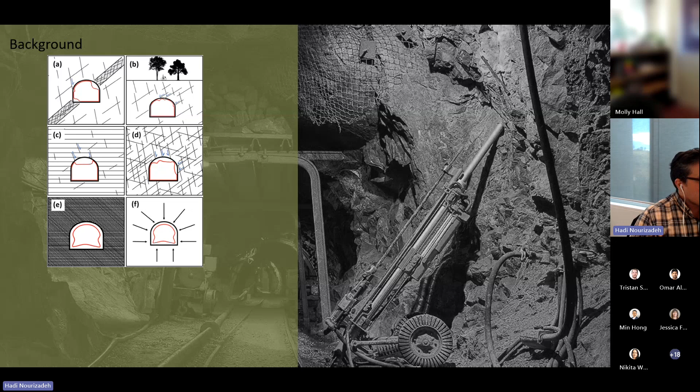So we need to improve the stability of these openings. We have different approaches by which we can improve this stability. Mainly we use ground support systems or reinforcing systems. In this session, I'm going to talk about the reinforcing approaches. So what is the reinforcing system? Reinforcing systems consist of many different elements, but mainly we call them rock bolts, cable bolts, or ground support systems.

So what is a rock bolt? A rock bolt is simply a deformed bar that we put inside a hole in the ground. Then we encapsulate these elements and fill up the gap between the rock mass and the reinforcing elements. We can use different encapsulation agents, such as cementitious grouts, which are very common in civil applications, and resin, which is very common in mining applications.

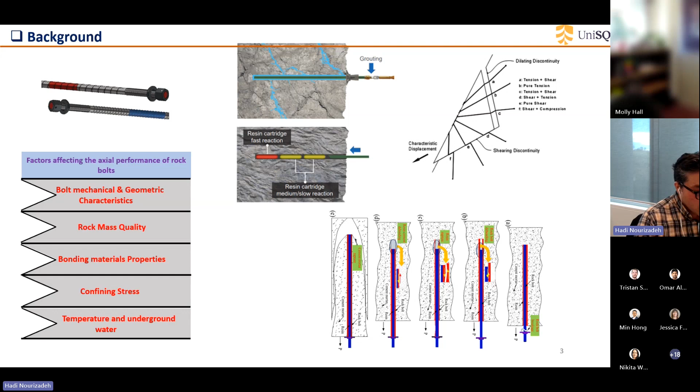When these elements are installed, different types of loads and deformation can apply on them. We can have axial, depending on the movement of the unstable rocks. So we can have tensile load, torsion, or shear, or something more complex, which is a combination of all these loads. In this session, I'm going to focus only on the axial behavior of these elements.

When we apply axial load on these elements, failure can occur in different areas. This can be on the reinforcing element itself due to rupture of the bolt, on the bolt-grout interface, or on the rock mass as well. By the way, these elements can be made of different materials such as steel, fiberglass, or carbon fiber. I don't want to talk about these materials; I'm just talking in general.

Different factors can affect the behavior of these reinforcing elements. These can be the mechanical and geometric characteristics of the elements themselves, rock mass quality, bonding material properties, confining stress, temperature, and underground water as well.

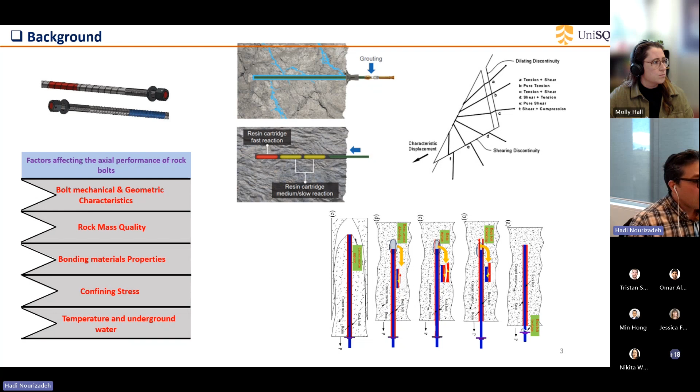If we review the literature, we can see that since 1980 the effect of confining stress has been acknowledged by many researchers, but basically they have assumed that the stress is in a hydrostatic condition. But when we install the reinforcing element in an underground application like an urban tunnel or mining, we have stresses around these elements with different magnitudes and different angles. In rock mechanics engineering, we consider three principal stresses around a reinforcing element, called sigma 1, sigma 2, and sigma 3.

This effect has not been considered in previous studies, but in this specific study, we put a step forward to see what the real effect of these stresses is if the magnitude is different in different angles. So we prepared some samples and conducted a push-out test using a true triaxial testing machine, which you can see on the right side.

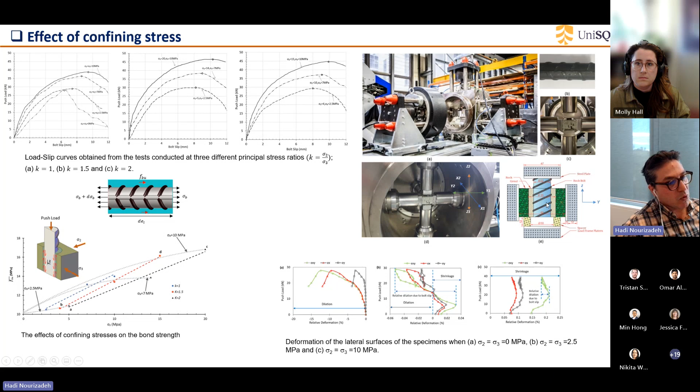Also, interestingly, we realized that at a specific sigma 3, for example 10 MPa, when we increase sigma 2, we see a plateau here. This is very important. Why? Because it shows that, for example, when underground we have 50 MPa or 60 MPa of stress, which is really high, we shouldn't expect higher bonding strengths. We also analyzed the displacement and the strain which occur due to the movement of these bolts, which I'm not going to talk about because it would take longer.

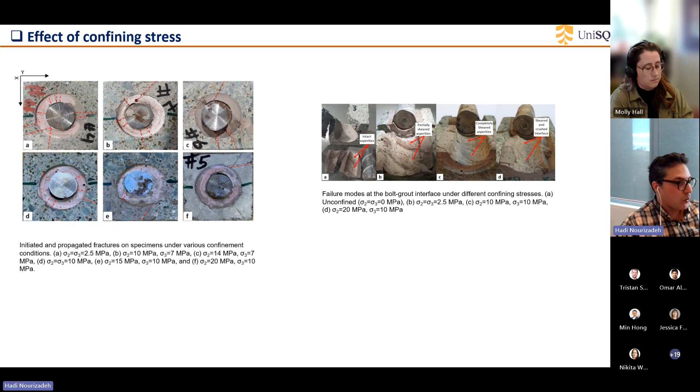Also, we sliced the sample and realized when we don't have any stresses, the failure is due to dilation or splitting of the sample, which is obvious. But when we increase the load, we realized that in addition to the shear failure, which occurred in the bolt-grout interface, we also have some damage as well. This is why when damage reaches a specific amount, after that we don't have an increase in the bonding strength of the bolt.

So one of the important aspects in the application of reinforcing elements in underground applications is the critical embedment length. What does it mean? It means for this specific bolt, what would be the critical minimum encapsulation length? So we prepared samples with different embedment lengths from 100 millimeter all the way to 400 millimeter with different bonding materials, A and B. A is a cementitious and B is a resin.

We cast concrete with a UCS of 60 MPa, encapsulated our samples and carried out pullout tests to see what the embedment length is and the effect of, for example, bonding materials on the critical embedment length. As you see in the diagram here, by increasing the embedment length, we have higher bearing capacity or axial capacity. But comparing these two, we see that the type of bonding agent also affects this behavior.

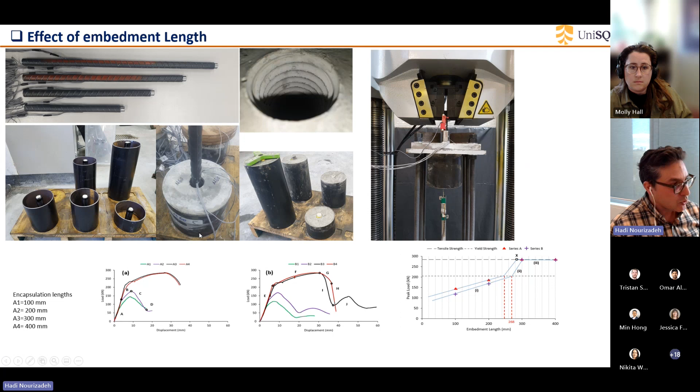Why? Because, for example, in this graph, we see just the total behavior of this bolt, but we know that the bond stress along this encapsulation length is different. To be able to analyze these data, we need to analyze the strain behavior, the deformation and elongation of the bolt along the encapsulation length. To do this, as I said, we instrumented our rock bolts. Similarly, we installed them in the same type of concrete, carried out some pullout tests, and analyzed the data.

So here we have different diagrams, which may be a bit confusing, but generally speaking, in the vertical axis we have interfacial bond stress. Interfacial means the interface between the bolt and the grout, or the encapsulation agent. So we have again different encapsulation lengths, including 100, 200, 300, and 400 millimeter.

So what is interfacial bond stress, and how could we calculate it? This interfacial bond stress is calculated by considering the strain values we got from the strain gauges that we installed along the encapsulation lengths. The difference between these strain values can give us the interfacial bond stress.

So if I just touch this one, here we see that we have a concentration of stress on both 0 to 50 millimeter and 50 to 100. These show the distance from the free end, which is here. For example, this one is 400 millimeter. So generally speaking, this distance is from the free end.

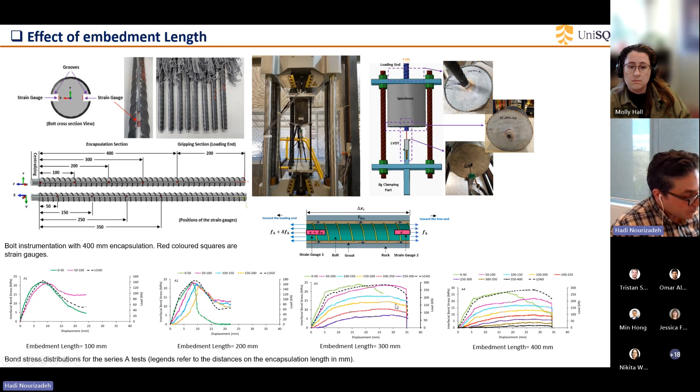But interestingly, for 300 and 400, as you see here, when the displacement of the bolt reaches around 15 to 20 millimeter, we see debonding here. But after that, we don't see any debonding until reaching the ultimate bearing capacity. So it is very important in terms of the design of our materials.

So also here we have some diagrams showing the embedment length and the bond stress, considering the different levels of pullout. For example, at 50% of the peak, this red line shows that the maximum bond stress is 50 millimeter inside the bolt, rather than exactly at the free end. This also shows that this part, let me just go back, for example, this part has already been damaged.

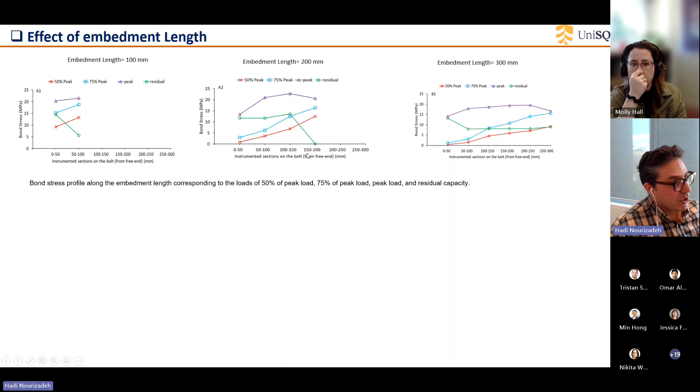But when the applied load reaches around the residual amount, residual is here, this area is called residual, so when it reaches the residual bond stress, the maximum bond stress can be seen at the free end. A similar thing is seen in the other samples as well. For example, here, the maximum shear stress at 50% is seen in the area 150 millimeter to 200 millimeter.

So in the literature, it is mainly said that the main factor affecting the bonding behavior of the reinforcing elements is the UCS of the grouting material. But by conducting some tests, we realized it is not the only factor that we should consider. We need to analyze more to see what exactly contributes more to this behavior.

So by developing some analytical models of fully grouted rock bolts, we realized that rather than compressive strength, shear strength or tensile strength, or for example elastic modulus or Poisson's ratio of these grouting materials, the shear modulus of the materials is more effective.

So, for example, here I just drew two graphs using these equations to see what is the effect of shear modulus on the behavior of these fully grouted bolts. So here we see that we have two different types of encapsulation agent, A and B. A has higher shear modulus.

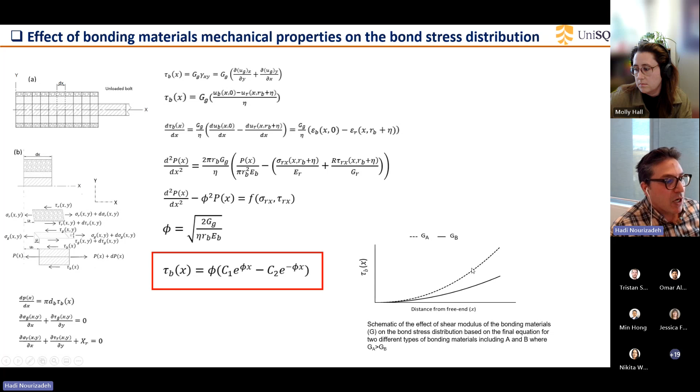This graph also shows that, when the shear stress at a specific distance from the free end, the bolt or the grout with higher shear modulus has higher bond strength as well.

So we also wanted to know, between the compressive strength, shear strength, and the tensile strength, which is more effective. So we conducted more tests using different types of encapsulation agent with different properties: G1 and G2 are cementitious, while R1, R2, R3 are the resins that you can see here. So we realized that there could be a correlation between these properties and the bonding behavior of the rock bolts.

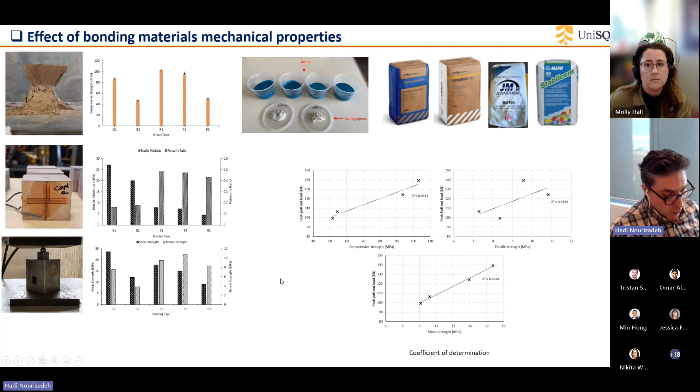So by statistical analysis, we realized the coefficient of determination, for example, between the compressive strength and the ultimate pullout load is around 94%. For tensile strength it is around 45%. However, for the shear strength it is 99%. This means that the tensile strength of the bonding agent has less effect on the bonding behavior of fully grouted rock bolts. However, the shear strength, and also, following up on the previous slide, the shear modulus are the most effective factors.

So we also analyzed the failure modes of these samples as well. We realized that for the materials with higher mechanical properties, rather than having radial cracks, we see some cone shape of failure on the surrounding rock. This is mostly important in civil engineering rather than mining.

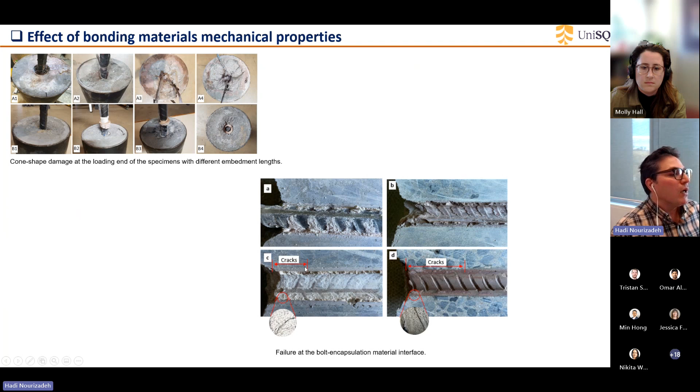So we also sliced our samples, and we could correlate some relationship between the type of bonding agent and the cracks and the failure modes of the bolt-grout interface. For example, in this figure in A, we have minimal damage on the bonding agent. However, in figure C, we see the bond is almost completely sheared off. Also, we could detect some micro cracks on the grout and rock as well.

So in terms of the effect of the rock mass on this,

Sorry guys, I know there's a noise in the background, but yeah.

So in terms of the effect of surrounding rock quality on the behavior of the bolting system, we developed some analytical models. We realized that we have two main factors, including the radial stiffness of the rock mass, as well as the compressive strength. So higher radial stiffness gives higher ultimate bond strength.

Sorry guys, just give me a second. Sorry guys for the interruption.

So as I said, we realized that we have main factors affecting the behavior of the fully grouted rock bolt, which include the radial stiffness and the compressive strength.

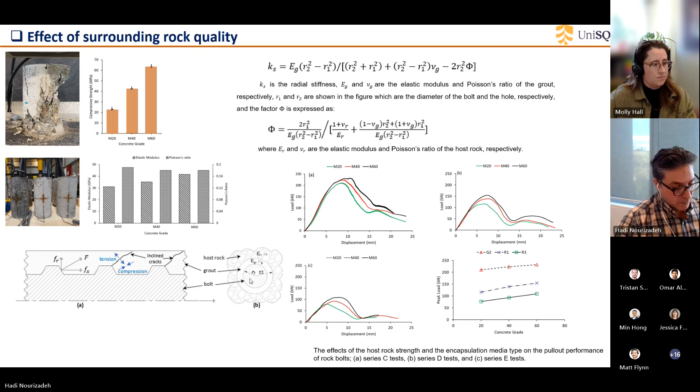All right. So another topic is the effect of temperature and environmental conditions on the behavior of the rock bolts. Why? Because in the presence of, for example, combustion or fire or in emergency conditions, we need to realize what would be the effect of temperature on the behavior of these reinforcing elements. Just imagine in urban tunnels, we already have installed these reinforcing elements. Then, unfortunately, we have a fire.

So what will be the effect of this fire on the stability of the tunnel? So what we did, we cast some samples using different types of resins. I'm just going to focus on one type of resin. In this resin, we installed some thermocouples at different distances. Then we carried out the pullout test again. We measured the true temperature along the encapsulation length.

As you see here, we have the ambient temperature, then 75 degrees all the way to 250 degrees. We have different distributions of temperature along the encapsulation length. So as you see, the higher temperature can cause an increase in the temperature along the encapsulation length. But when we go deep into the encapsulation length, the temperature drops significantly. So by conducting the pullout test, we realized that the type of resin can significantly affect the behavior of these bonding materials.

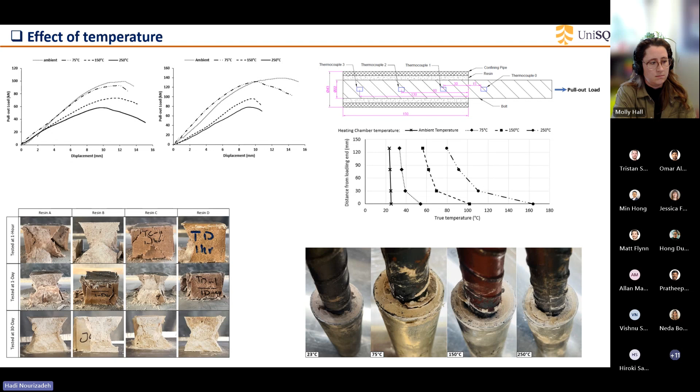All these data show that we need to consider the effect of temperature and environmental conditions when we design any reinforcing systems. So I think this is the end of my presentation.